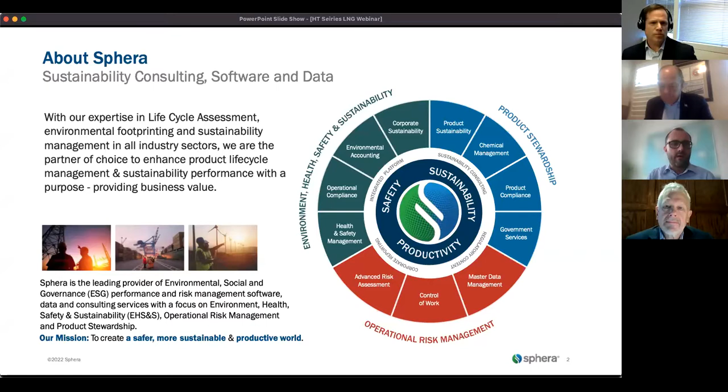So Sphera is an international software, data and consultancy company headquartered in Chicago, in the US, and it's a leading provider of environmental health and safety, operational risk and product stewardship management software, all operating in the domain of ESG. And in our consultancy group, we help businesses to optimize operations, drive product innovation, and help to increase transparency through fact-based greenhouse gas performance quantification. And that's also what we are talking about today.

And if you please click to the next one, I want to take the opportunity to introduce the greenhouse gas intensity study for LNG as a marine fuel, which we have prepared for SEA-LNG and SGMF. And since the first study we performed in 2019 was quite a success with more than 3,000 downloads, we updated the study last year and published it in April last year with the most up-to-date data. This study was a sort of lighthouse study to provide ship owners, investors, regulators an accurate analysis on the latest developments in ship engine technology, as well as in the supply chain.

The study itself is based on a very detailed technical bottom-up analysis. It's following a life cycle approach, so from well to wake, following the ISO standard for life cycle assessment, ISO 14044. And it was really looking at the global average fuel supply and regional individual supply chains for the corresponding fuels. And if you analyze LNG, you have a benchmark you compare with. For that, we chose very low sulfur fuel oil and marine gas oil, the MGO and VLSFO, where we also did some analysis.

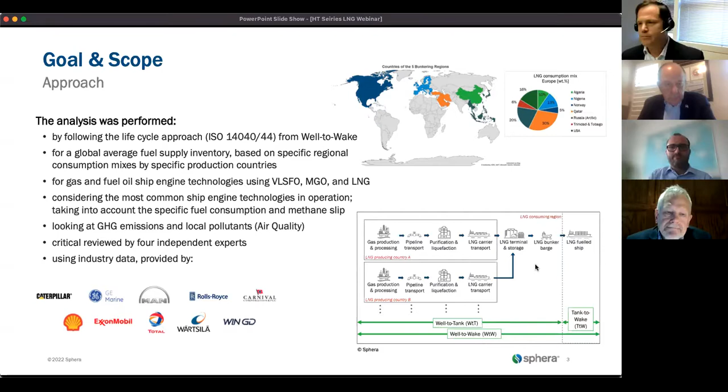What we analyzed from well to wake was the environmental performance of the different technologies. On the upper left-hand side, you see the results for the two-stroke slow-speed engines. On top is the benchmark for very low sulfur fuel oil with 0.5% sulfur content, which results in 688 grams CO2. And on the bottom, you see how the two LNG engine technologies compare, and there's an advantage of, depending on the technology, 14 to 23% compared to the conventional fuel oil engines.

What you also see is that the combustion in the engine, the green part of the bars, is the dominating part, while the supply chain has a minor role. And if you look at the discussion about CO2 and methane, you have to look at the right-hand side, where you see the individual greenhouse gases contributing to the global warming potential. The main part is coming from CO2, while minor parts are related to methane.

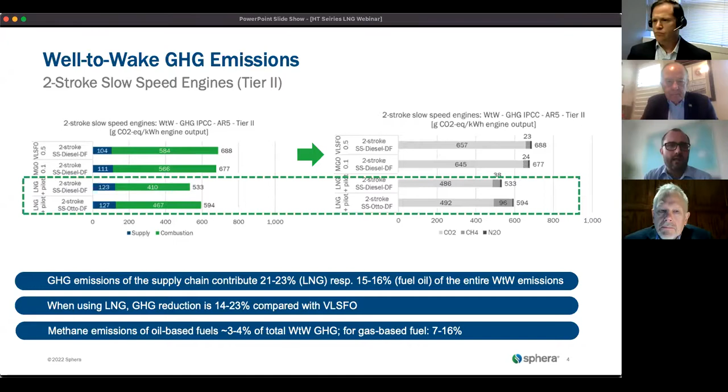Similar to the two-stroke engines, we analyzed the four-stroke engines. If you please click to the next one, you see similar results, with advantages of using LNG compared to conventional oils in the order of 6 to 14%. This is a little lower than the two-stroke simply because different engine technologies are in place, resulting in a little less advantage. But keep in mind that around 70 to 75% of global shipping is deep sea shipping and belongs to two-stroke, while the other 25% is four-stroke shipping.

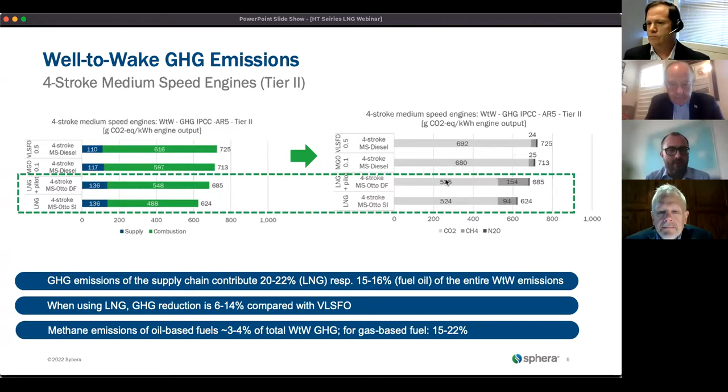Then maybe just click to the next one; I don't want to go too much in detail. The study is available for download, and also the slide deck. As I said at the beginning, methane emissions are a topic in that context. What we also did in this analysis is look at what is expected to be improved over the next years.

As you probably know, there are a lot of initiatives going on in the LNG and fuel supply chain in general in terms of reducing the methane emissions. Reducing the methane emissions in the supply chain over the next years will for sure also impact the overall greenhouse gas performance of the supply. Reducing the methane emissions by 35% in the supply chain will result in a well-to-tank emission reduction of around 9% in 2030.

The same applies for the LNG use, so the usage in the ships, in the engines. We did some interviews with ship engine manufacturers, and they have already demonstrated and are further working, and I think we have experts here on the panel who will elaborate further on these aspects, on optimization, improvement in the design, and developing solutions such as catalysts to further reduce the methane up to 90%. I'm curious to hear later how this development is ongoing.

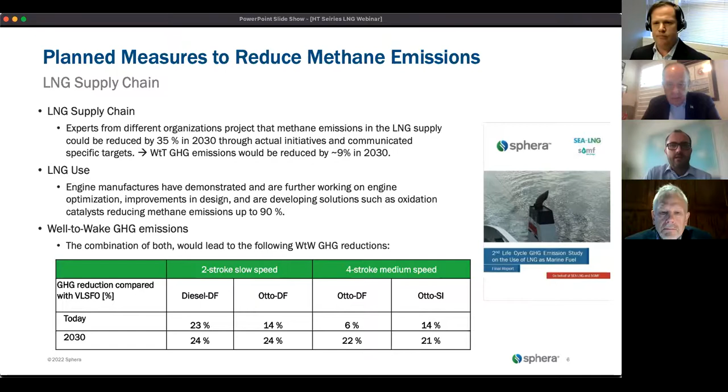What we concluded, and maybe go to the next one, is that the whole study is a 160-page report with lots of details, information and numbers, and it's really a technical bottom-up analysis. Five minutes is too short to go into much detail, but feel free to have a read. It looked at the most common ship technologies in operation, gas and oil-based engines, taking into consideration the fuel consumption and the methane slip, with the latest up-to-date, accurate data, so comparison was possible.

It was also looking, even if not shown here, at air pollutants, where LNG shows quite some advantages compared to conventional fuel oils. And it's based on primary data which we collected. Most of the effort in the project was to really collect the primary data, going to the different companies and bringing the data into such an analysis. As said, it was following the ISO standard, which is quite specific.

There's been an ISO standard for life cycle assessment for 30 years, developed and applied in industry. In our study we strictly followed the standards from a well-to-wake perspective, and it was critically reviewed by 4 independent reviewers across the globe, giving validity to the results and conclusions. The criteria of the study were to be complete, to have all the engines, to have quality assurance, and to be objective. That leads to the conclusion that LNG is a viable alternative marine fuel to conventional fuels in the market today.

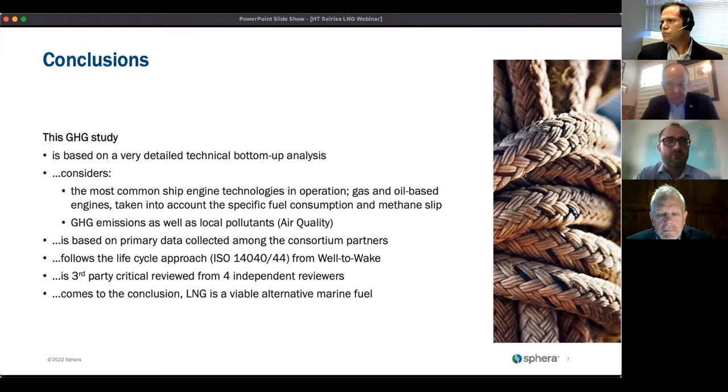If you move to the last slide, I'm closing with a sort of takeaway. As said, LNG is a fully compliant, viable solution available on the market, so you can go and bunker it today. It helps to reduce greenhouse gases by up to 23% in the international shipping context, and it's therefore also contributing to the IMO greenhouse gas reduction target.

LNG as a gaseous fuel also contributes to improving air quality, particularly important for ports and coastal areas. With ongoing optimization in the supply chain as well as engine technology developments, the benefits of LNG are further enhanced by reducing methane slip emissions. And as an outlook, LNG is replaceable by bio-LNG and synthetic LNG without major adjustment to the engine.

So it can be replaced, and fossil LNG can be more or less phased out by just adding bio and syn to the fuel mixes. And then last but not least, LNG helps to contribute to the IMO targets and lowers the carbon intensity of international shipping.

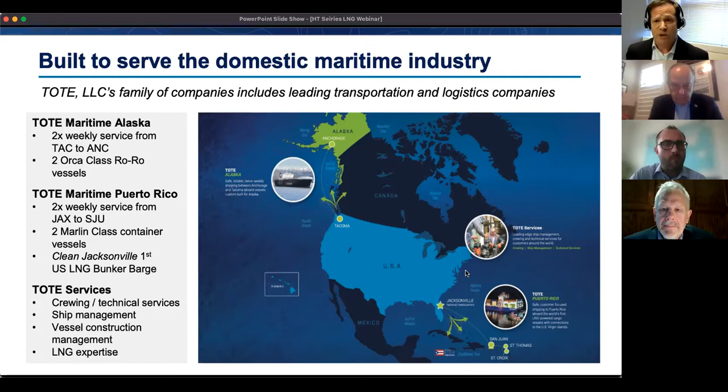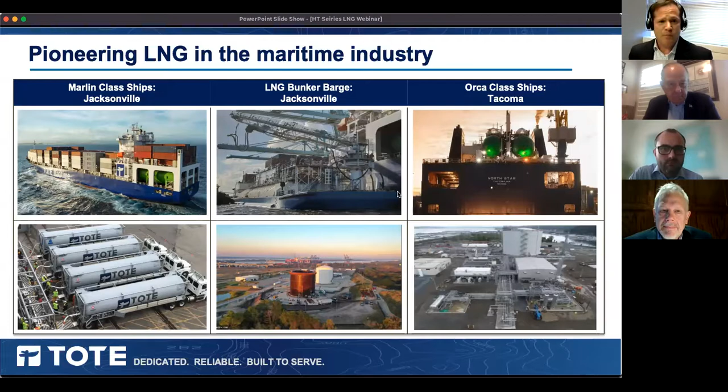So Tote's historic use of LNG as a marine fuel began in Jacksonville with the vision of my fellow panelist, Peter Keller, who was an executive at Tote at the time. So we all know that in 2008, IMO decided to cut the sulfur in marine fuels. So Tote was faced with the challenge of designing our next generation of ships. We work with partners across the globe on the ship design. We had to put together the infrastructure to support the fueling operations. And we work closely with Flag State, United States Coast Guard, ABS to bring this dream to reality.

The results: by 2015, Tote delivered the world's first LNG powered container ship and started fueling with the LNG skid. The next year, we delivered the world's second LNG powered container ship. In 2018, the first LNG bunker barge in North America, the Clean Jacksonville, started delivering LNG to Tote. Next slide, please.

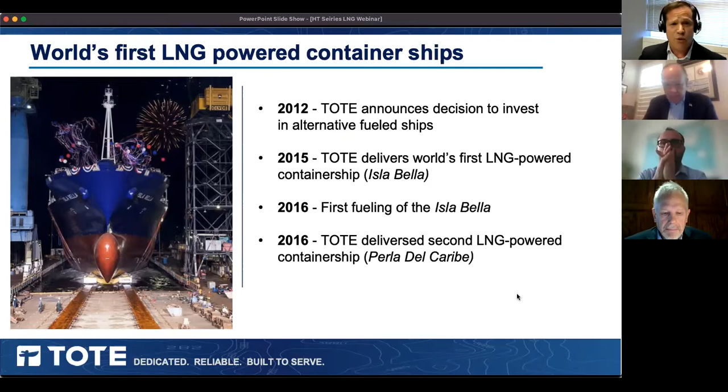So our focus has always been to meet or exceed the regulatory requirements and improve the environment for the communities we serve. And like Peter said at the beginning, we wanted to do that immediately and today. By switching our Marlin class vessels to using LNG as a marine fuel, we've been able to exceed the regulatory requirements. We use half as much fuel, we carry 70% more cargo. Greenhouse gases have been cut by 62%, or 120,000 metric tons. And to put this in perspective, that's 26,000 cars on the road annually.

An interesting fact is that when we first started operating our vessels, we were as high as 5% MGO pilot oil. Through rigorous testing, through working with the OEM, we've been able to reduce our MGO pilot oil to closer to about 1.25%, which results in even better environmental performance.

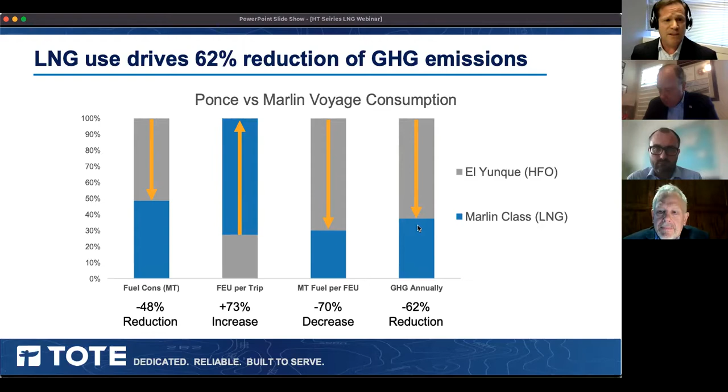Next slide, please. This slide depicts our 2 bunkering solutions. On the left is our interim bunkering facility, or the bunker skid. The IBF skid is a United States Coast Guard approved facility that has the capability of loading over 1,000 cubic meters in 10 hours, making it ideal for any mobile bunkering solution. The skid was the primary method prior to the Clean Jacksonville coming online in the Port of Jacksonville for Tote's Marlin class vessels.

And on the right, as I've mentioned before, is the Clean Jacksonville, which is North America's first LNG bunker barge. Tote Services, my company, was the driving partner behind the project. The Clean Jacksonville can bunker 1,000 cubic meters in the span of 4 hours, with the customers conducting simultaneous operations. To date, we've performed over 200 bunkerings, including third parties, and we've managed to continue with the simultaneous operations of third parties also. Tote operations teams were leading the way for clean energy bunkering solutions here in North America.

And I want to point out a few other facts about Clean Jacksonville. She's a membrane tank with 2,200 cubic meters. She's fully automated with a reliq system for boil off gas management. And then she's also designed to be minimally manned, so it requires minimal personnel to complete a bunkering. We're typically able to do a bunkering with 2 personnel aboard the vessel. Next slide, please.

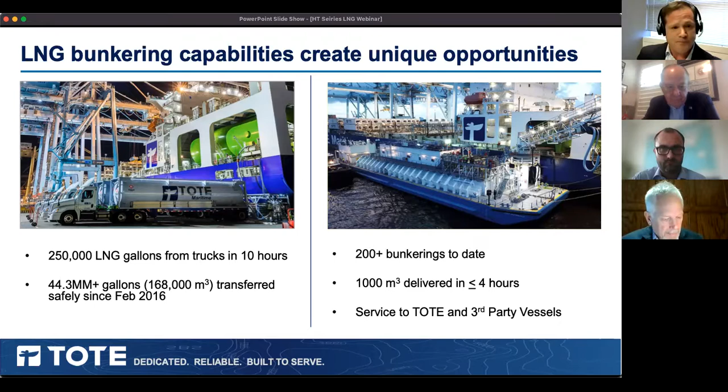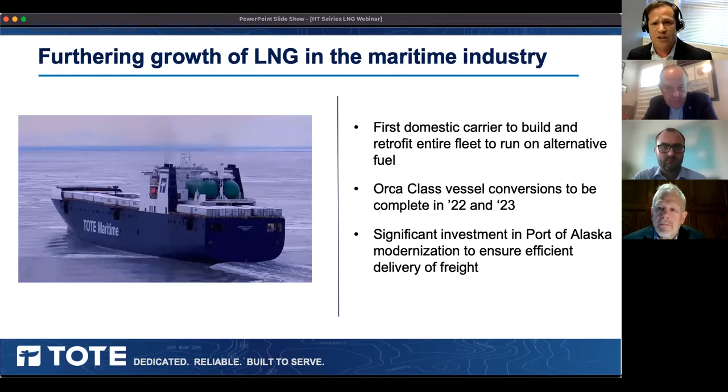Tote is committed to using LNG now and into the future, realizing that the fuel is a path forward. We're currently investing in our 2 Orca class vessels, which operate between the Tacoma and Anchorage trade, and we'll be the first company to retrofit an entire fleet. The Orca conversions will be completed in Q2 of 2022, so just right around the corner. We'll be complete with our first conversion and operating on LNG, and then our next conversion will start in 2023. Next slide.

First, I'd like to point out, I want to thank GTT for providing the graph. They're our partners and friends. This graph demonstrates the pathway towards decarbonization through bio and synthetic fuels. LNG is not a transition fuel. As Pete says all the time, it's a fuel in transition. So let me provide a quick example.

In September of 2021, RNG was supplied to the Marlins through our partners at Jax LNG, demonstrating that clean LNG can be integrated now. Produced from the decomposition of organic waste, that BioLNG is compatible with existing natural gas infrastructure and provides practical and replicable sources of energy that mitigate and repurpose those carbon emissions.

From the graph, we can see that LNG already provides commercial benefits when compared to emerging alternative fuels and traditional fossil fuels. We can also see the progression ends with synthetic LNG being cost-effective and as environmentally conscious when compared with other emerging fuels. e-LNG can be dropped in utilizing infrastructure, reducing upfront capital costs and the risk for a reliable supply of clean energy. Based on these significant investments Tote has made to date, we're well positioned to continue our leadership position in the marketplace in the clean fuel revolution.

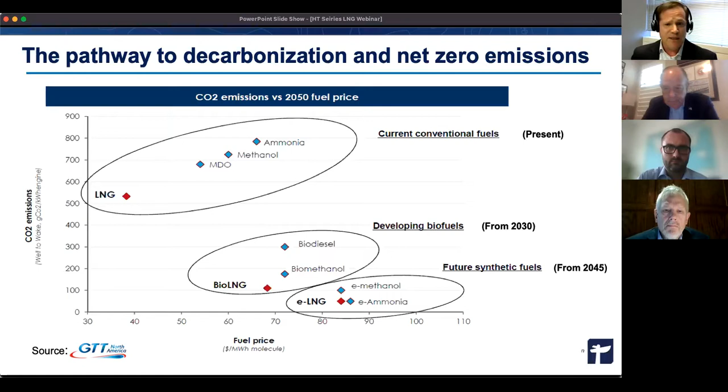Closing slide, please. In closing, thanks for allowing the opportunity to share our experiences. We're proud of all our historical achievements we've made with our exceptional partners, and we certainly look forward to questions. Thank you very much.

Thanks, JP. Obviously, there's a lot going on in the Tote world as regards LNG, and thank you for that. I'd now like to move to John Hatley from Wärtsilä to talk about what the OEMs are doing and what some of the future cast issues might look like. John?

Thank you very much for the opportunity to be here today. We're very appreciative of this opportunity to speak on LNG as a fuel and some of the great efforts Wärtsilä has going on to reduce the emissions, particularly the methane slip. Next slide, please. Just as a signpost in the market, and then I'll only have a couple slides here. This was announced in the middle of November that Wärtsilä has for 2-stroke engines a new process that reduces the methane slip to negligible levels.

This is actually neither an Otto process nor a diesel process, as the thermodynamics now has a third new medium pressure process where the gas is not used, rather it is used as an ultra cold liquid injected into the combustion chamber. So there will be something new in the thermodynamics books for us to all study.

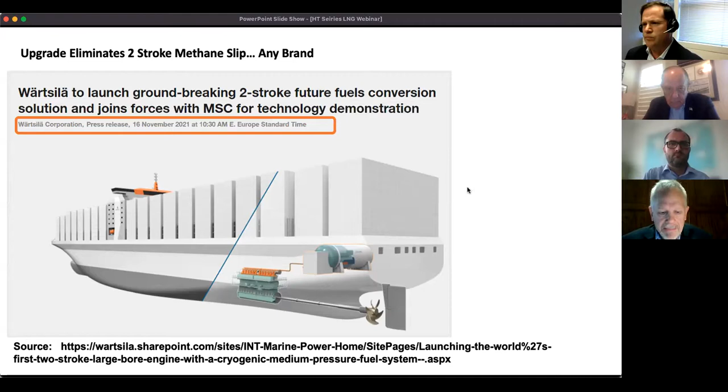Next slide, please. We also want to talk a little bit about how you're future-proofing with LNG as a fuel. We heard a bit about the drop-in using BioLNG and synthetic LNG from the previous speakers. This is real and is going forward. At Wärtsilä, the engineers like to talk about why it is so neat, in nano details about features and benefits, how it works, how it is great, and how you need more of it. Just to be clear, reciprocating engine technology today and in the very near future will combust those future fuels before they're available.

Some other milestones. We've been in LNG for more than 25 years. Biosynthetic methane, verified in 2003, nearly 20 years ago. Methanol, verified in 2015 with the Germanica, which has now been operating 7 years on this fuel with a 4-stroke engine. Ammonia, validation going on this year. Hydrogen, validation by 2025. The hot link to this article and several other technical things are shown here. Please refer to it. And our website has a lot of other information.

But as engineers talk about flexibility, there may be some engineers in the audience, but I think this is Marine Money, meaning we have a lot more bankers and financiers involved. So let's just translate that to what it means in the financial circles: a real asset option. We all know that in times of greatest uncertainty, and certainly there's a lot of uncertainty now with regulations on emissions, what the banks are doing on the voluntary side with principles, what the cargo charterers are doing with the Sea Cargo Charter, what the insurance industry is doing. All those are voluntary industrial shapers. And then the IMO with regulatory changes on the A, B, C, D, E ratings on carbon intensity. Times are very uncertain, technologies and fuels, and on and on.

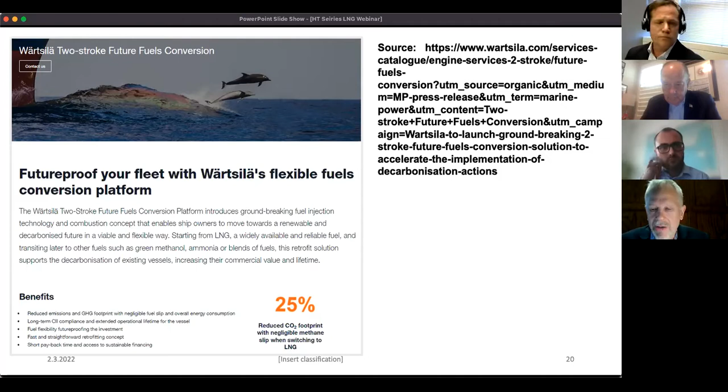I think John's 4 A's are always a very interesting way to look at what's going on and what the future of maritime fuels is really going to look like. At the end of the day, as I said earlier, I think there's a practicality issue and certainly an issue of acting now as opposed to acting decades from now. Because between now and when some of these other what I refer to as magic elixirs are available, there's a lot of time that has to take place and a lot of technology and a lot of changes that have to take place.

In terms of questions, I did note one question on the EU taxonomy.

Certainly those of us that are watching the EU understand that their Fit for 55 program is very far reaching, and is still frankly being formulated. There are many open questions and areas where the regulations do not seem to totally jive. There's certainly a lot of political issues going on, and certainly the very unfortunate situation in the Ukraine right now is not making any of that easier or easier to discern.